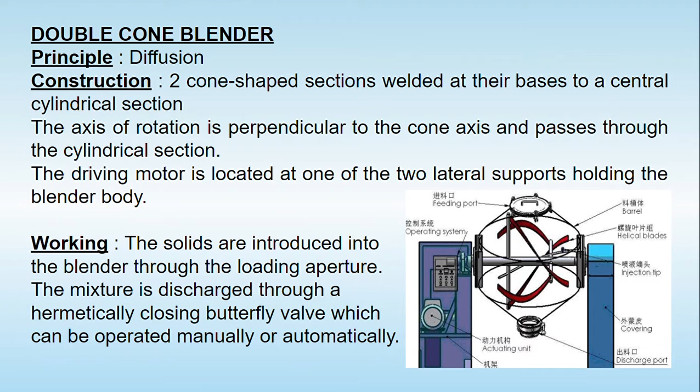So how does this double cone blender carry out the blending of solid powders? The solids are introduced into the blender through loading apertures, and once the blending process is over, it is discharged either manually or, nowadays, by use of a hermetically closing butterfly valve, which can be operated manually or automatically.

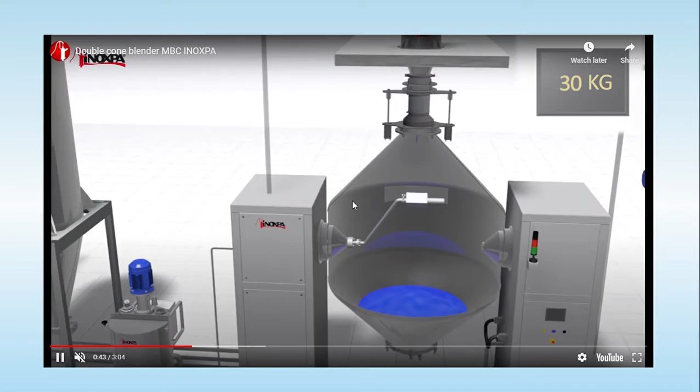Let's try to understand in detail how this double cone blender carries out the blending of powders. As shown, the blue solid material is loaded in a small quantity from the top. Then the second color solid material is also loaded.

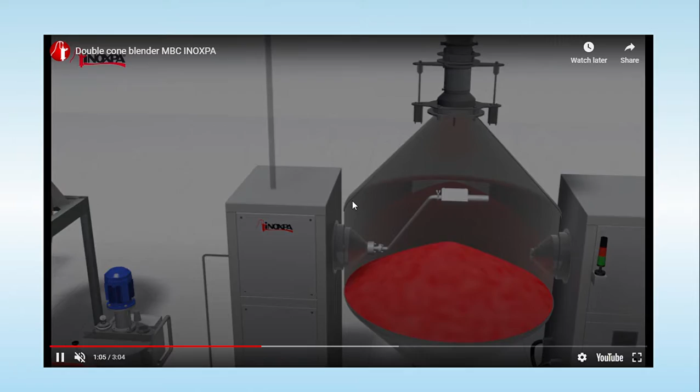It is taken up by automatic suction through the device, from the bottom with the blue material. Now it is covered with a larger quantity of red solid material, and again the suction will take more solids, shown here in green color. The green quantity is somewhat more than the blue but less than the red. So basically the three solids—blue, red, and green—are mixed together.

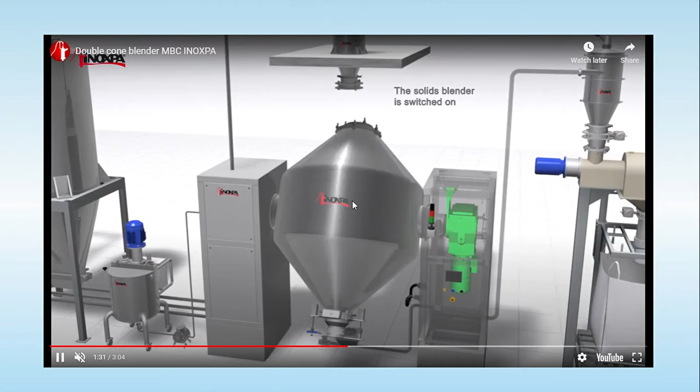As shown, the double cone blender starts revolving on its horizontal axis, and because of that, all three different colored solid materials are going to be blended with one another.

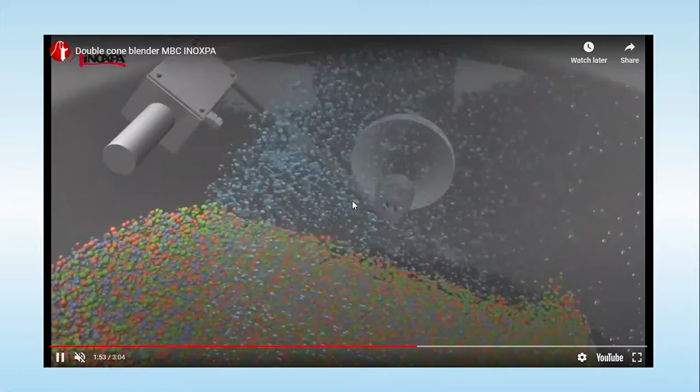Sometimes if it is required to mix with a small amount of liquid, the liquid is sprinkled in the form of fine droplets, shown as light blue color. When the mixing of the entire equipment is complete, the blending of powder materials with the liquid takes place, and the product is discharged by use of a vacuum pump or other suitable device.

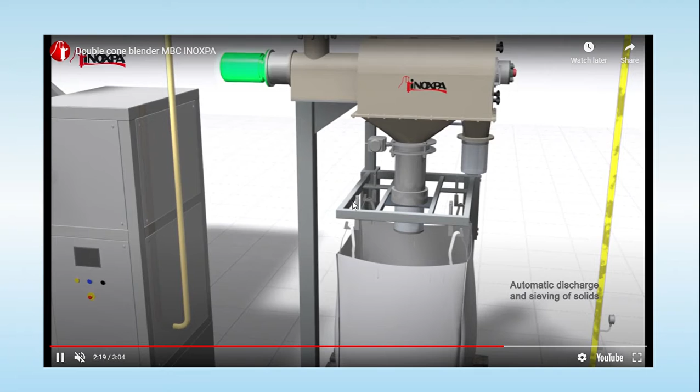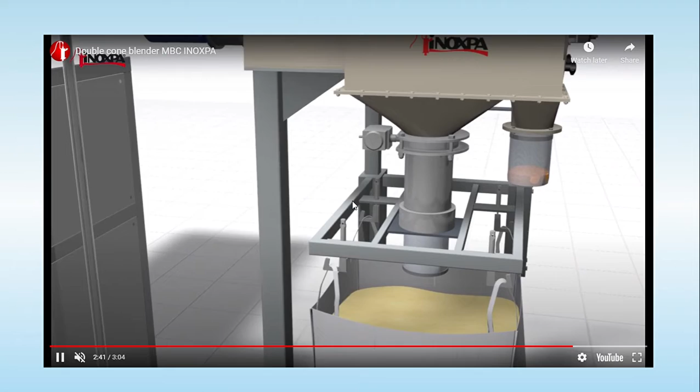Sometimes the product is passed through a sieving device with sieving apertures. When it comes out, we get a uniform blend of the entire solid materials with the liquid, as shown here, and that can be used for further stages of granulation—either dry or wet granulation—or sometimes made suitable directly for direct compression in tablet manufacturing.

Double cone blenders are also widely used nowadays in the pharmaceutical industry, and they form part of the granulation department, where the mixing of solid material or the preparation of granules is also carried out in this manner.

Now let's try to understand the disadvantages, advantages, and applications. The working efficiency of this type of double cone blender is very high. It is easy to operate, requires low labor since everything is carried out automatically, it is versatile, and requires minimum maintenance.

But looking at the other side of the coin, what are the limitations? Since a tumbling action takes place inside, and because of this tumbling action the diffusion blends the solid material with one another as well as liquid molecules, it is not suitable for fine particulate systems of ingredients with a large difference in particle size or density. Because it rotates on its horizontal axis, segregation or separation can take place, so it will not lead to uniform blending of the powders together.

If the powder is free flowing, serial dilution is required. So we cannot add the free flowing powder all at once; instead we add it in a number of steps, or design the process so that the free flowing powder is mixed very well with the less free flowing powders.

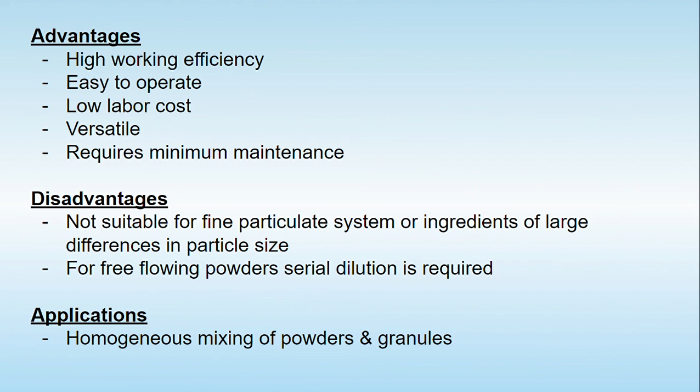As I told you, it is used for the homogeneous mixing of powders and granules together, and it is an important equipment in the granulation department of tablet manufacturing in the pharmaceutical industry.

So today I just gave the idea in this video about the double cone blender—the construction, how the mixing is carried out, and what are its advantages, disadvantages, and applications.